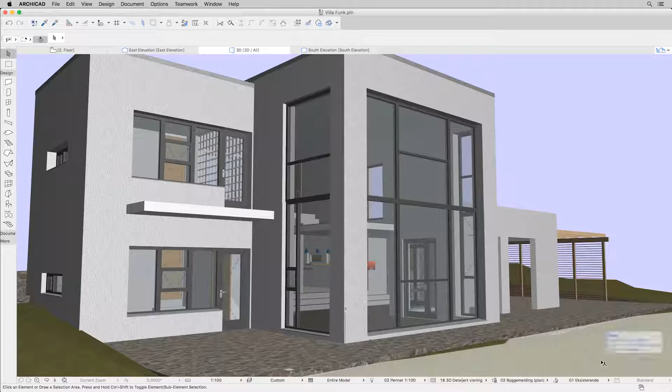We'll give you some advice on how to prepare your ArchiCAD BIM project before exporting it as a BIMx project. Then you'll see how to share a BIMx hypermodel with clients using the BIMx model transfer service. And finally, we'll explain how to present, explore, and understand your building designs.

Let's first see what you need to start creating BIMx projects with ArchiCAD. Please note that you need to have Graphisoft ArchiCAD version 17 or later to publish BIMx hypermodels. If you don't have ArchiCAD yet, download a fully functional 30-day trial version from myarchicad.com.

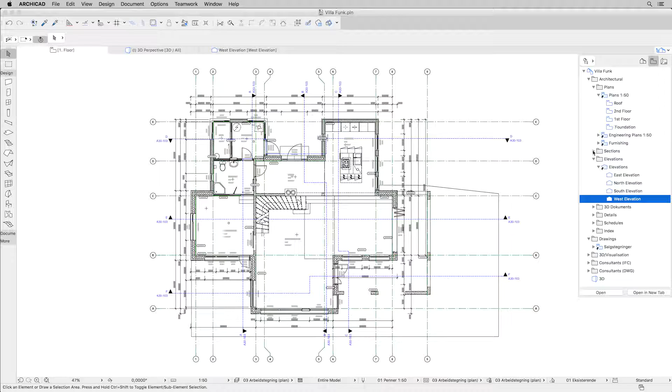Please open a design project that you'd like to export as an interactive BIMx hypermodel. Here are various project views of the Villa Funk residential project: a floor plan, a cross-section, as well as a 3D perspective view.

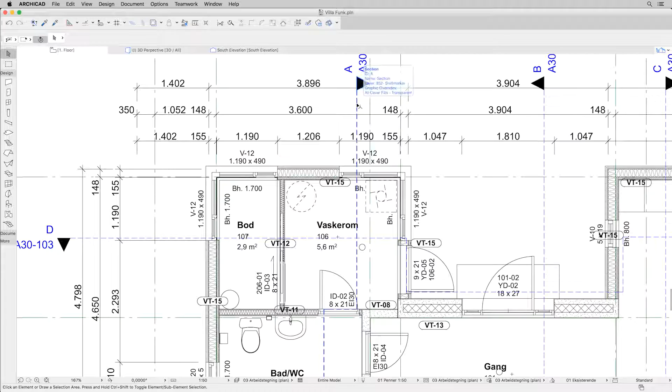Before diving into the actual steps to create BIMx hypermodels, let's overview a couple of things that we should keep in mind before publishing. The advantage of BIMx hypermodels is that they incorporate both the 3D model and the corresponding 2D documentation set of a building.

BIMx hypermodels provide a tight connection of 3D and 2D design information, similar to hyperlinks and the linked content on the Internet. So if we wish to create a BIMx hypermodel, it is optimal if we have both the 3D model and the 2D documentation set available and properly prepared in ArchiCAD beforehand.

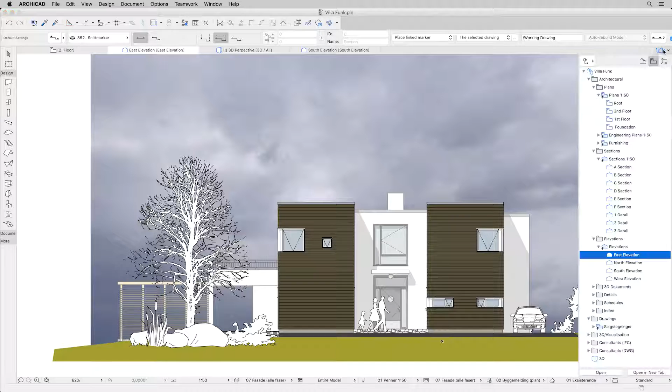It's recommended to create a dedicated 3D view that we would like to present as the default 3D view in the BIMx model. Please make sure that a 3D project view is open, and then initiate the publishing process using the Publish BIMx Hypermodel option from the File menu.

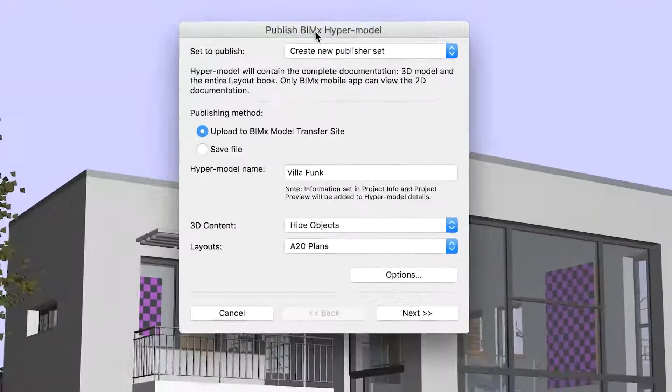This initiates the BIMx Publishing Wizard, which is the recommended workflow if you are publishing for the first time. The wizard will prompt you to create a new publishing set, meaning that you will be able to select those project views and drawings that you'd like to include in the BIMx project in addition to the 3D model. More experienced users might opt to use the organizer to create, then carefully fine-tune, and finally publish BIMx hypermodels.

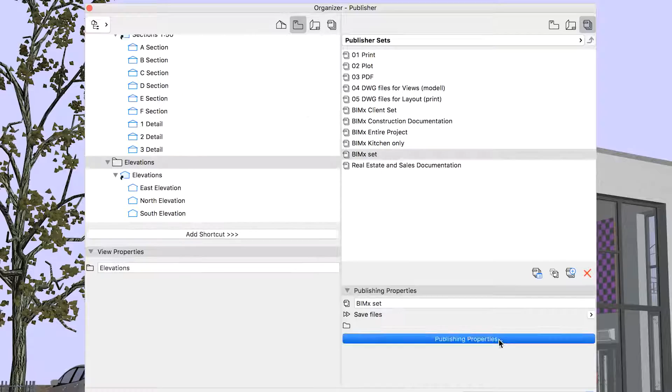In the next video, we will continue by publishing the BIMx hypermodel to the BIMx model transfer site.